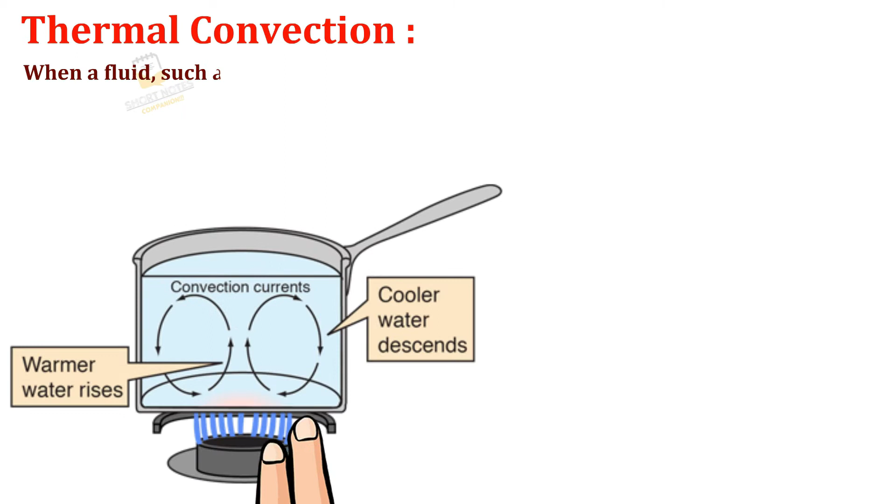What is thermal convection? When a fluid such as air or a liquid is heated and then travels away from the source, it carries the thermal energy along. This type of heat transfer is called convection. At the molecular level, the molecule expands upon the introduction of the thermal energy, becomes less dense and rises, as you can see in this picture.

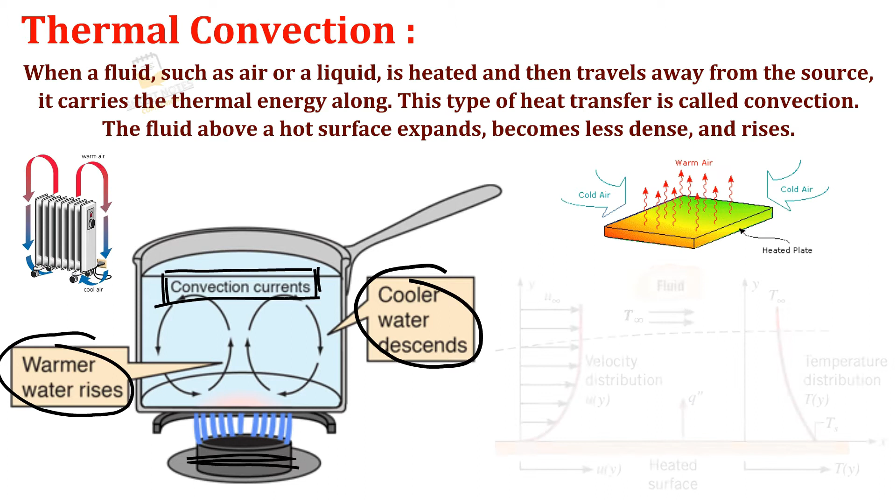This rising and descending of the fluid causes convection current. Space heater is a very good example of it. This diagram represents how is the velocity distribution and temperature distribution of fluid during convection. In one line, we can define thermal convection as heat energy transferred between a surface and a moving fluid with different temperatures is known as convection.

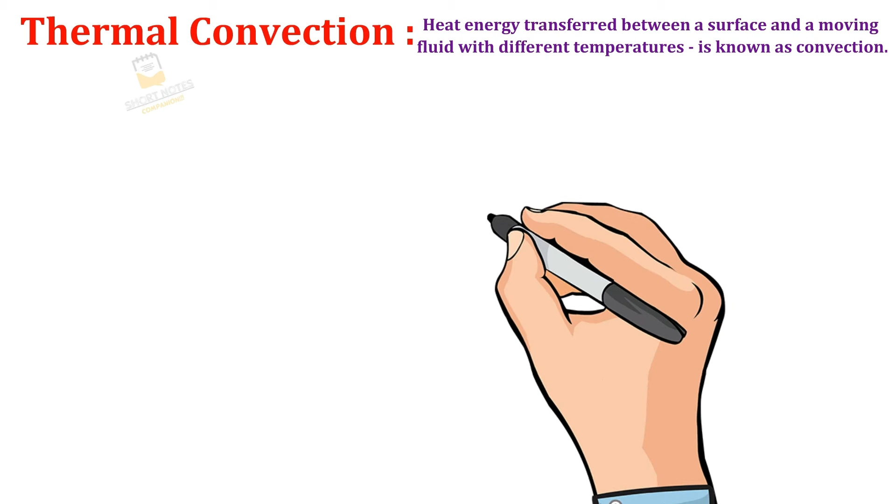Convection is broadly classified into two types. First is forced or assisted convection, in which fluid is forced to flow over the hot body. It requires external force such as a pump or a fan. As you can see in this picture, you can observe the temperature distribution varies from surface temperature to free stream temperature, and heat flux varies from leading edge to trailing edge. Heat decreases along the length of the hot body.

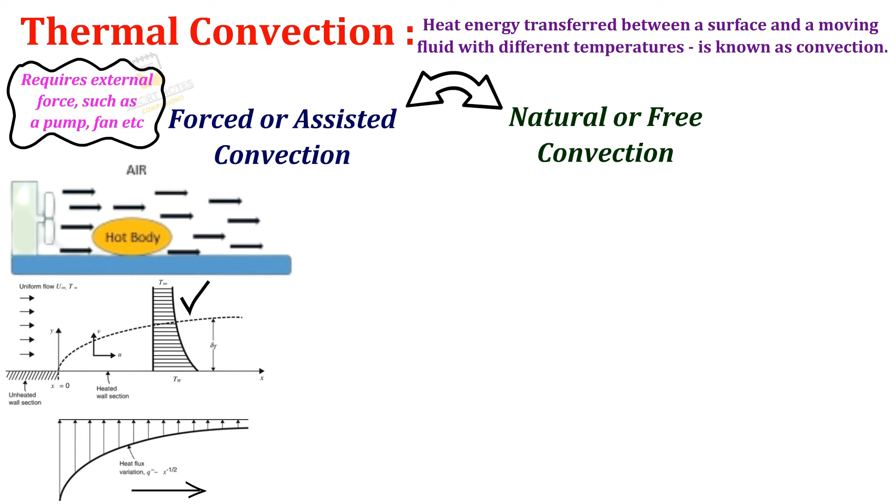Second type is natural or free convection. This type of convection will occur when the fluid is coming in contact with the hot body without having any external force. This happens due to buoyancy force occurring due to density differences. Here you can see the temperature distribution, and fluid will always flow in upward direction. For an example, we can observe this heated vertical wall where fluid flow again is upward due to convection heat transfer. Same for horizontal plate, where downside is heated, the fluid is crossing the plate sidewise and going upwards.

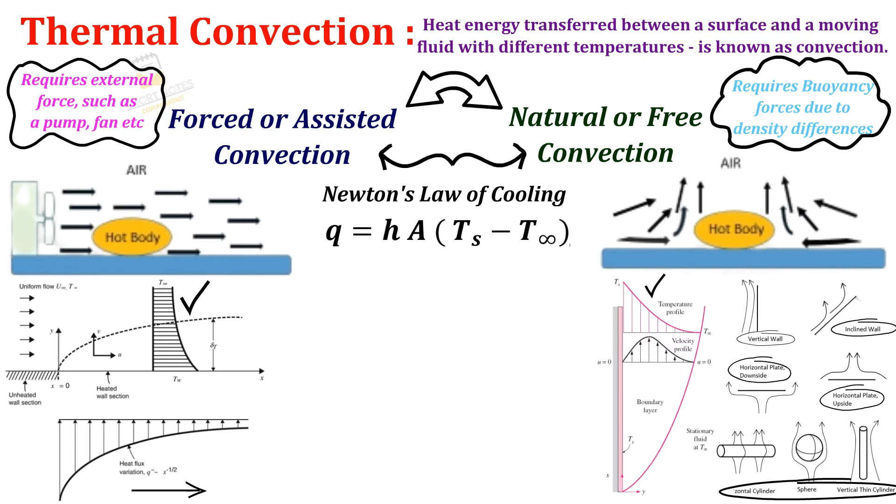This will happen when the heated body is introduced in stationary fluid. Now for both the convections, governing law is Newton's law of cooling, which is Q equals HA(Ts - T infinity). Usually the value of H is found out by conducting various experiments. Typical standard values for convective heat transfer coefficient: for free convection, gases have 2 to 20, liquids have 50 to 1000; for forced convection, gases have 25 to 300, and for liquids 100 to 40,000. And for convection with phase change, boiling or condensation, it is very high, about 2500 to 1 lakh.

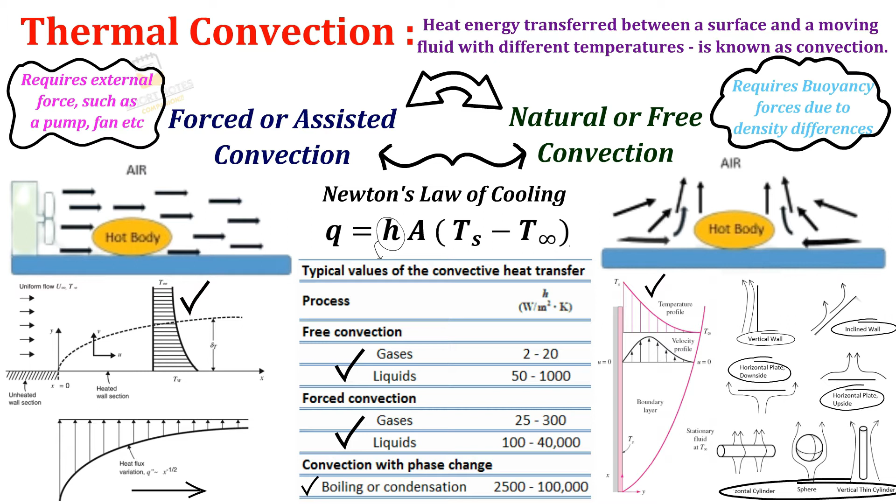Next हम देखते हैं important dimensionless numbers जो हम थर्मल कन्वेक्शन में यूज करते हैं उसको एनालाइज करने के लिए। तो सबसे पहला है रेनॉल्ड्स नंबर। इट इज द रेशियो ऑफ inertia force upon viscous force, and it can be written as rho v L upon mu, or v into L upon nu, where nu is kinematic viscosity, mu upon rho, and Reynolds number signifies whether the flow is laminar or turbulent.

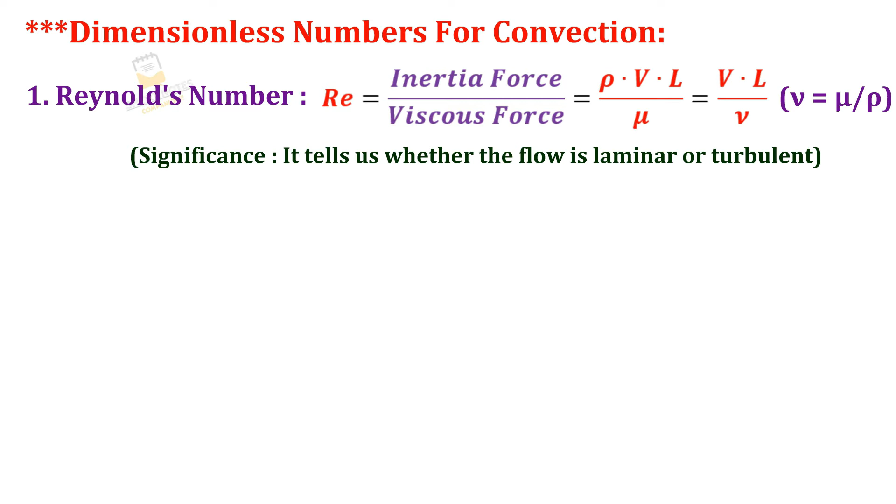Then next is Nusselt number. Nusselt number is ratio of convective heat transfer upon conductive heat transfer, which can be written as HL upon K, and it signifies the enhancement of heat transfer due to convection as compared to conduction.

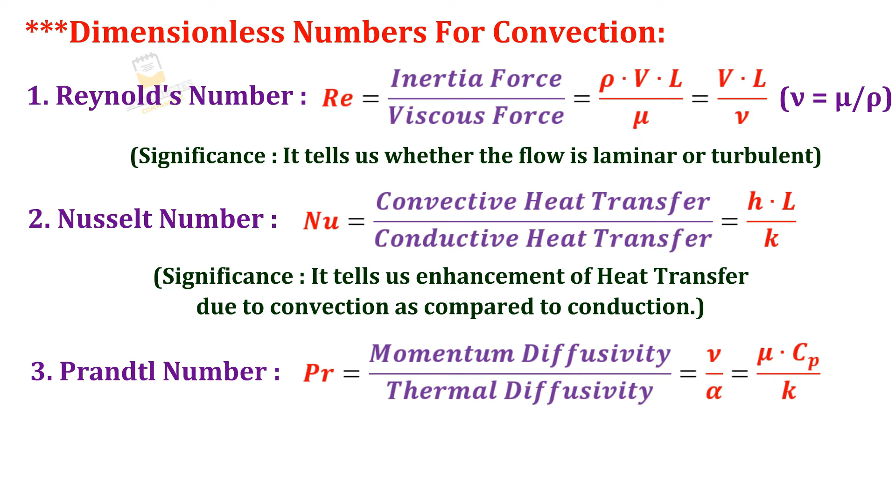अगला है प्रांटल नंबर, जो होता है रेशियो ऑफ मोमेंटम डिफ्यूजिविटी अपॉन थर्मल डिफ्यूजिविटी, म्यू सीपी अपॉन के, और ये हमें बताता है कि थिकनेस ऑफ थर्मल बाउंड्री लेयर कितनी है एज कंपेयर टू वेलोसिटी बाउंड्री लेयर। इट आल्सो टेल्स अस अबाउट टाइप ऑफ फ्लूइड बिकॉज इट इज अ प्रॉपर्टी ऑफ फ्लूइड।

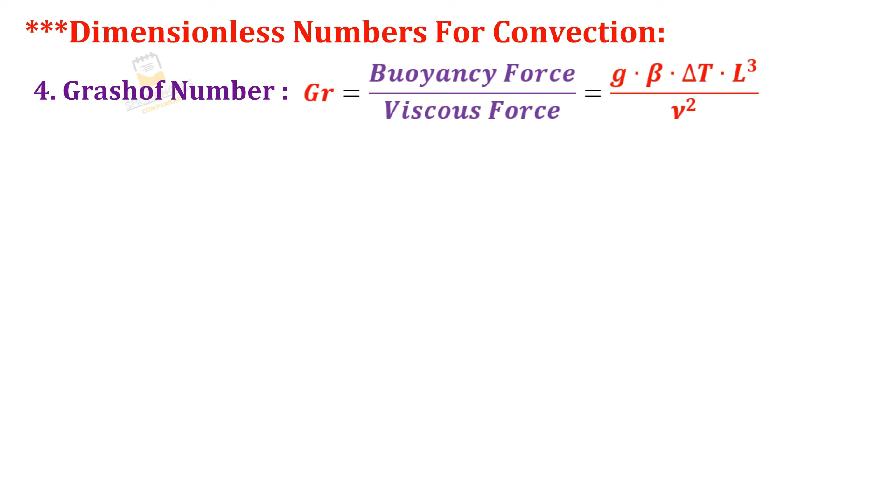नेक्स्ट नंबर है ग्राशॉफ्स नंबर, जो है रेशियो ऑफ buoyancy force upon viscous force, and it can be written as G beta delta T L cube upon nu square, where nu is again kinematic viscosity, and its significance is it is associated with buoyancy driven flow, and it is used in flow analysis of natural convection. Next, Rayleigh number.

Rayleigh number is the product of Grashof number into Prandtl number, and it tells us whether the flow is laminar or turbulent in case of natural convection.

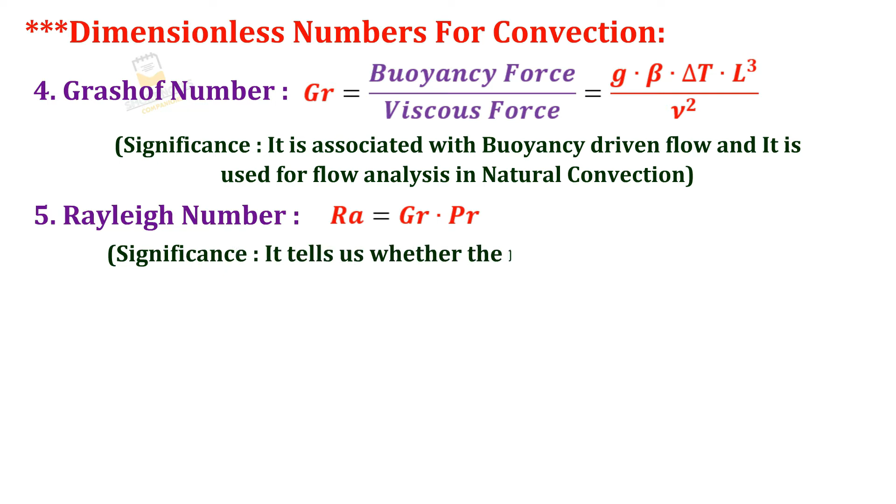Sixth is Stanton number. It is the ratio of convective heat transfer upon heat capacity of the fluid, which we can write as Nusselt number upon product of Reynolds number into Prandtl number, or H upon rho v Cp, and its significance is that we use it in force convection heat transfer calculations.

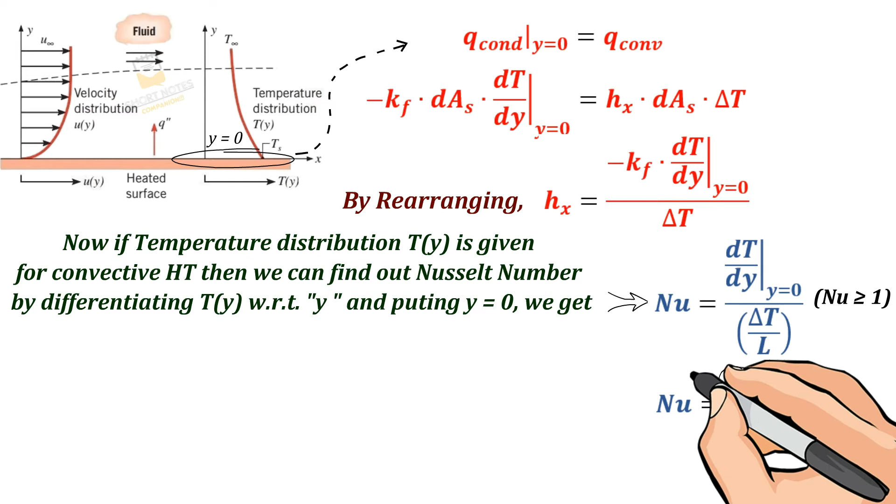L is characteristic length, and for flat plate it is x, for pipe with diameter d it is d, and for rectangular cross section it is 4a/p, where a is cross section area and p is wetted perimeter.

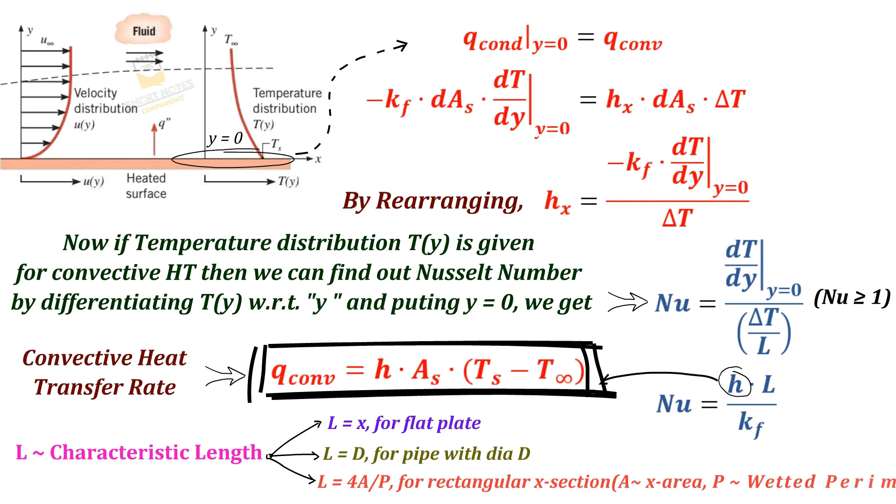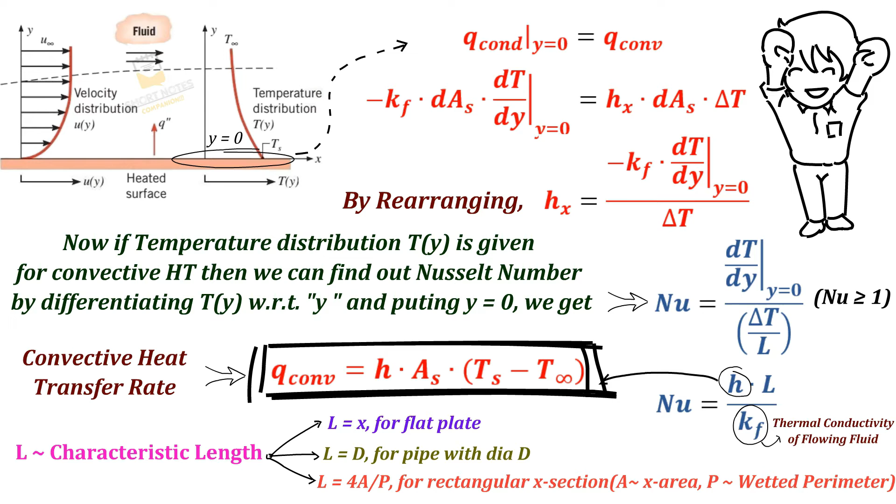Here kf is thermal conductivity of flowing fluid. Remember, in next part of the video we will consider only k, and it will represent the thermal conductivity of flowing fluid only. Next we start with forced convection, in which the first case is forced convection over a flat plate.

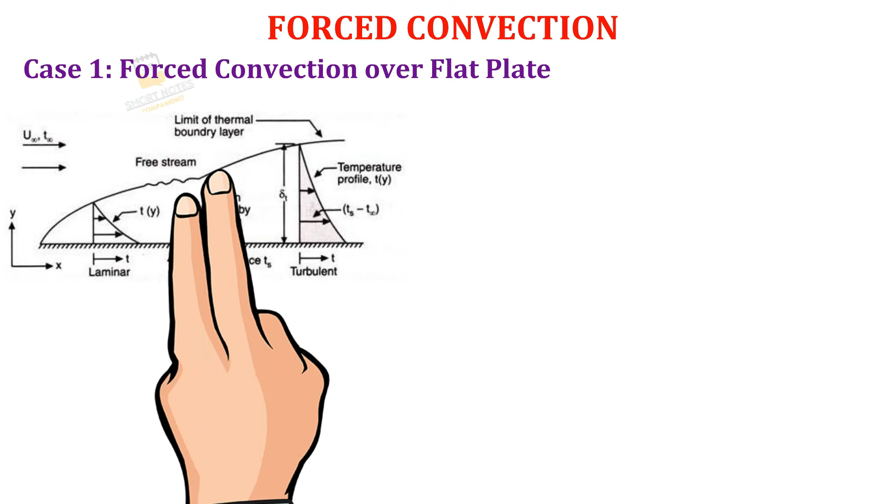You can observe this in the diagram. If the Reynolds number value is less than 5 × 10⁵, we say the flow is laminar, and for fully developed laminar flow where x critical > L, you can write Nusselt number = hx/k = 0.332 √Rex into Prandtl number power 1/3.

Average heat transfer coefficient can be found by using 1/L integration from 0 to L of hx dx, where we get average heat transfer coefficient = 2 times HL or hx, and average Nusselt number can be written as 0.664 √ReL Prandtl number power 1/3. This is the average over full length.

Then Prandtl number power 1/3 is equal to velocity boundary layer thickness upon thermal boundary layer thickness, and for Prandtl number equal to 1, that is for gases, both the boundary layers become the same.

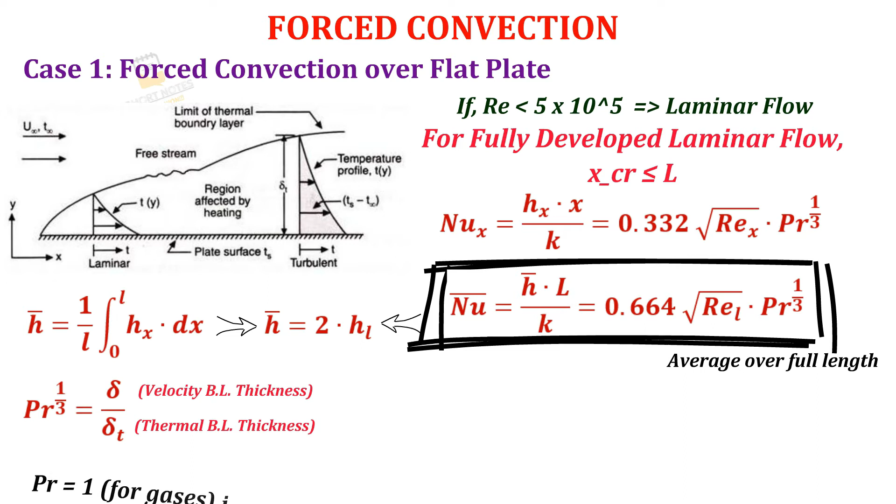Now according to Reynolds analogy, Stanton number is equal to Cfx/2 when Prandtl number is equal to 1, and Stanton number into Prandtl number power 2/3 is equal to Cfx/2 by Colburn's analogy when Prandtl number is not equal to 1, and this Cfx is skin friction coefficient.

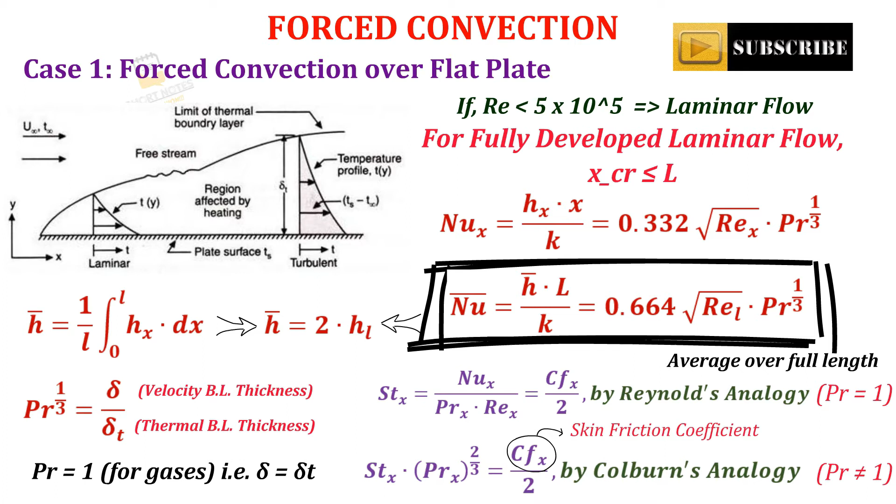Next we look at turbulent flow. If Reynolds number is greater than 6.5 to 7 into 10⁵, then we can say there is turbulent flow, and for fully turbulent flow, that is x critical is very less than L, Nusselt number is equal to 0.029 Re power 0.8 into Pr power 1/3.

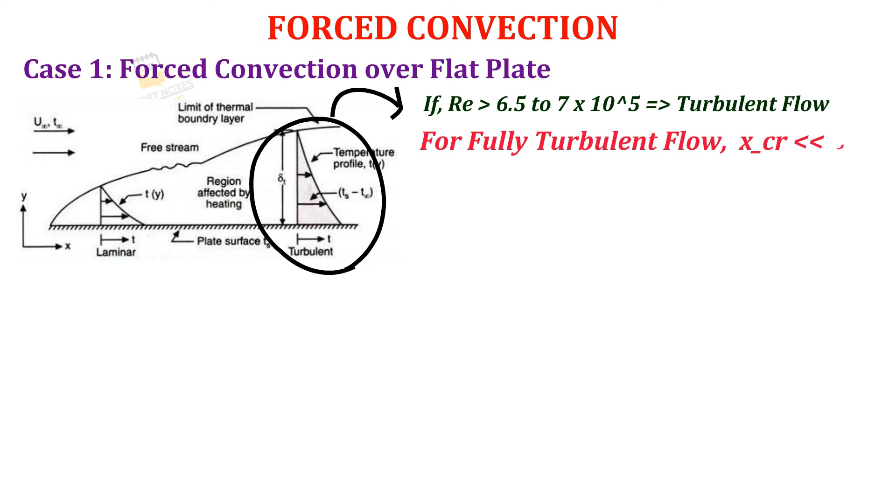For transition flow, meaning when Reynolds number is between laminar and turbulent, Nusselt number value is 0.036 Re power 0.8 minus 870 into Pr power 1/3, and in turbulent case average heat transfer coefficient is equal to 5/4 into hx.

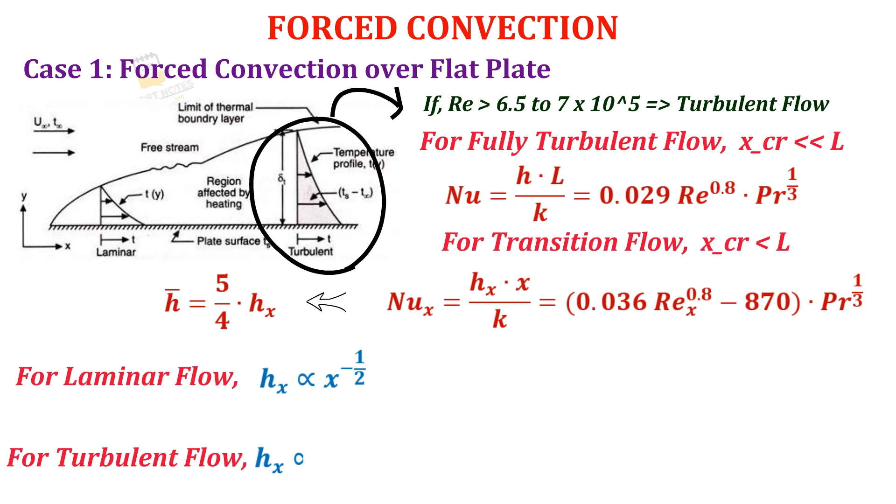For laminar flow, hx is directly proportional to x power -1/2, and for turbulent, hx is directly proportional to x power -1/5.

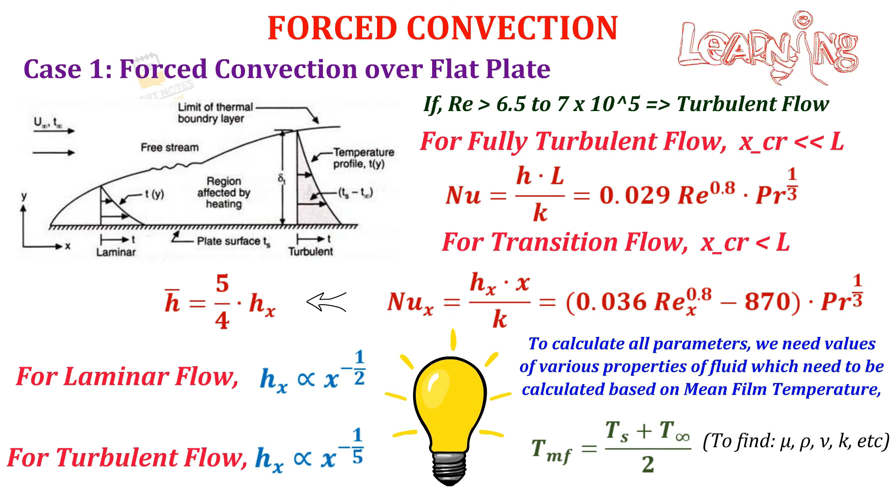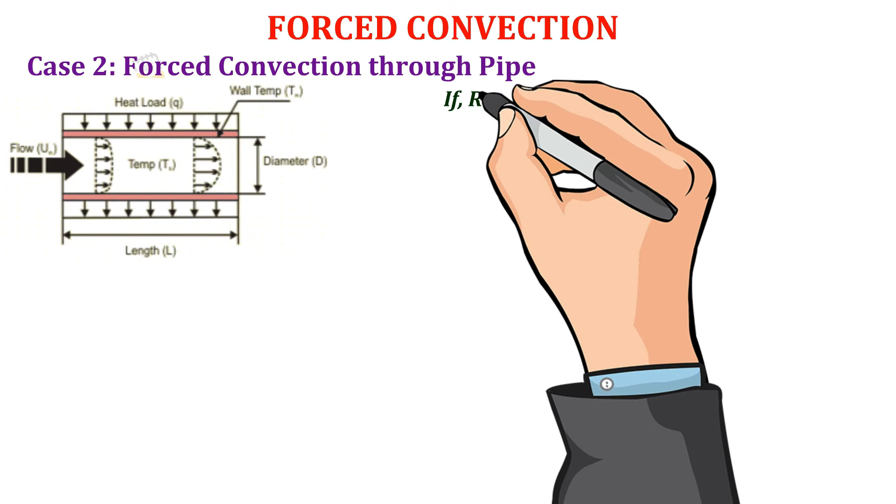Now we look at case 2, forced convection through pipe. In this case, if Reynolds number is less than 2300, then there will be laminar flow, and in this first case is constant wall temperature, meaning surface temperature remains constant and fluid temperature is changing from inlet to exit.

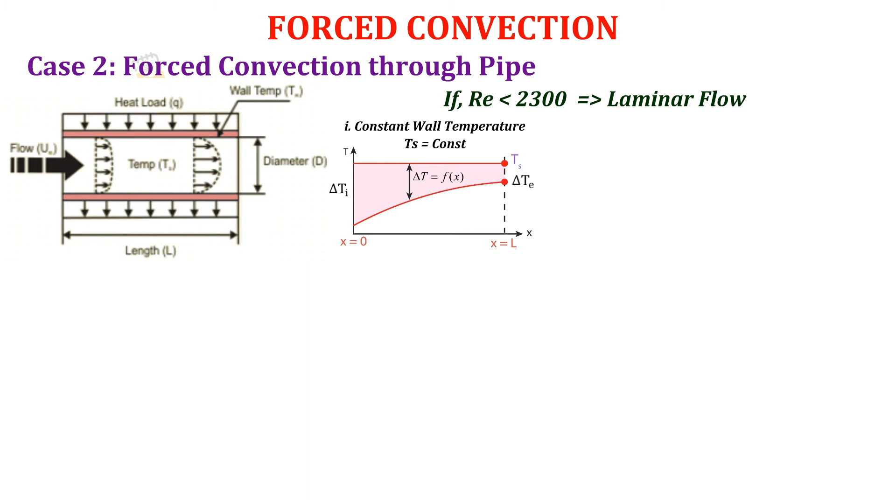In this case, Nusselt number has a constant value of 3.66, and this temperature change of fluid is exponentially distributed.

This can be calculated using the formula: delta T upon delta Ti equals e power minus HAS upon mCp.

Now if we need to calculate the heat transfer rate, we can calculate it as HAS delta Tm, where delta Tm is LMTD, same as we have seen in heat exchangers.

Now the second case is constant wall heat flux, where heat flux is constant over the entire tube surface. For this case, the Nusselt number value remains constant at 4.36, and in this case LMTD: delta Ti equals delta To, as delta T remains constant.

If Reynolds number is greater than 4000, then it will be turbulent flow, and for this Nusselt number equals 0.023 Re power 0.8 Pr power n, where n is 0.4 for heating of fluid and n is 0.3 for cooling of fluid.

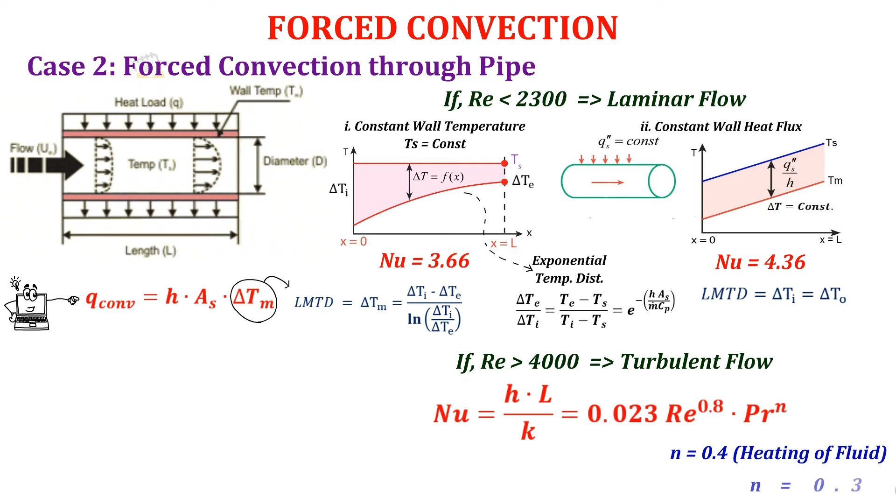Now bulk mean temperature of fluid is the mean of inlet and exit temperature of fluid, and mean film temperature is surface temperature plus bulk temperature upon 2. Here we can also write Q convective equals HAS times (Ts minus T bulk).

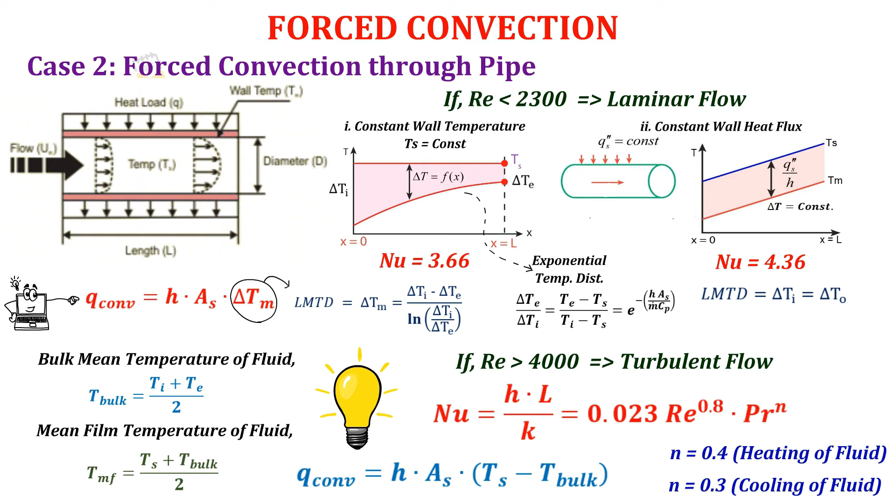In natural convection, the first case is a horizontal plate, for which the Nusselt number value is 0.54 Ra power 0.25, where Ra is the product of Grashof's number and Prandtl number, and Grashof's number is G beta delta T L cube upon nu square.

Here G is acceleration due to gravity, beta is 1 upon mean film temperature in Kelvin, delta T is Ts minus T infinity, and L is the characteristic length.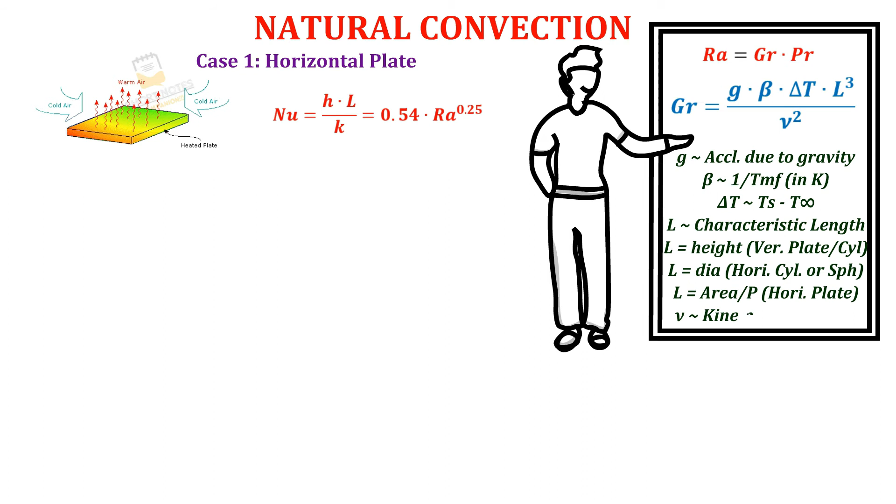In natural convection, L equals height for vertical plate or cylinder, L equals diameter for horizontal cylinder or sphere, and L equals area upon perimeter for horizontal plate. Now for the vertical plate case, flow will be laminar if Rayleigh's number is between 10 power 4 and 10 power 9.

Nusselt number is equal to 0.59 times Rayleigh's number power 0.25. And for the turbulent case, Rayleigh's number should be greater than 10 power 9 and less than 10 power 12, and for this Nusselt number equals 0.13 Ra power 0.3.

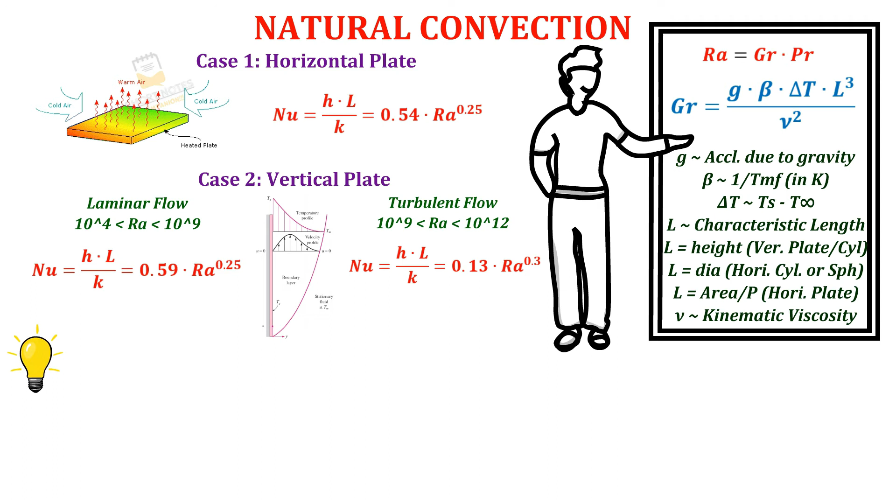Now there is one more important dimensionless number, the Richardson number, equal to Gr upon Re power 2, which tells us the type of convective heat transfer. If this number is much greater than 1, natural convection dominates. If it is much less than 1, forced convection dominates, and if it equals 1, mixed convection occurs.

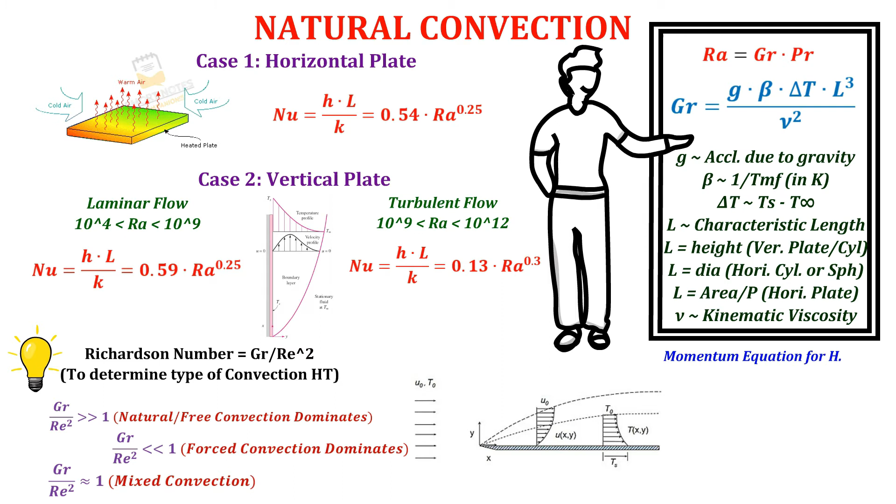For the hydrodynamic boundary layer, the momentum equation is U (dU/dX) plus V (dU/dY) equals nu (d2U/dY2), and the energy equation for the thermal boundary layer is U (dT/dX) plus V (dT/dY) equals alpha (d2T/dY2).

And in natural convection, Nusselt number is directly proportional to delta T power m, where m equals 0.25 in the laminar case and 0.3 in the turbulent case.

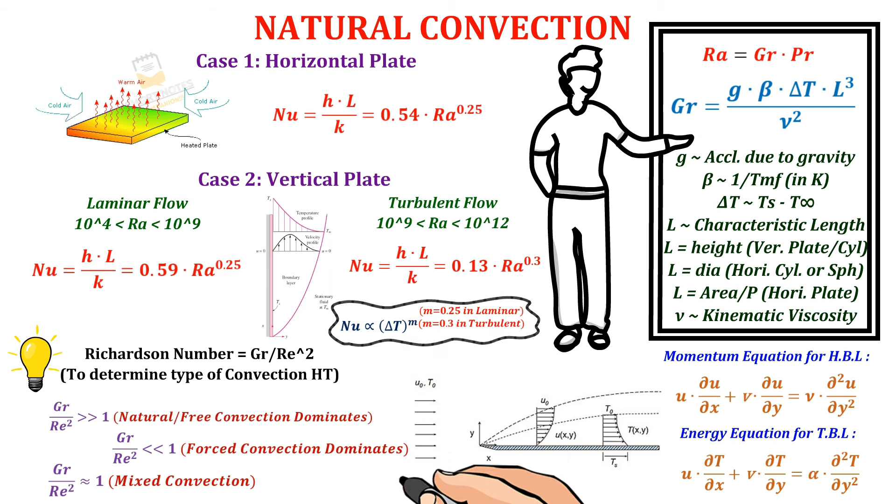Now we have finished the convection part. Next we will start radiation. So what is thermal radiation? Thermal radiation is very different from conduction and convection, as it does not require any material medium.

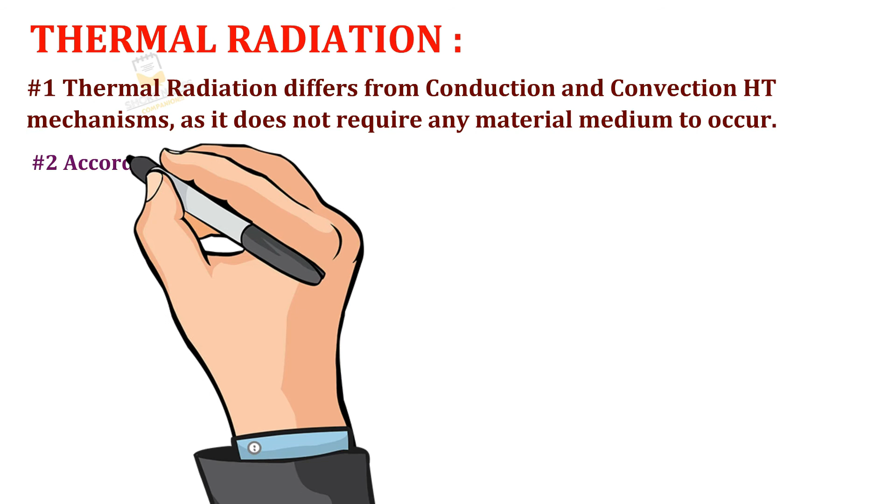Radiation heat transfer के लिए किसी भी मीडियम की जरूरत नहीं होती. मैक्सवेल सर ने बोला है कि एनर्जी ट्रांसफर जो होती है रेडिएशन में, वो इलेक्ट्रोमैग्नेटिक वेव के फॉर्म में होती है, and energy transfer by radiation occurs at speed of light, and best effect we can see it in vacuum.

Electromagnetic spectrum is spread over a wide range of wavelengths. Thermal radiation occurs in the range of 100 microns to 0.1 microns, which includes infrared, visible and some part of ultraviolet spectrum. So remember, thermal radiation occurs from 0.1 micron to 100 microns.

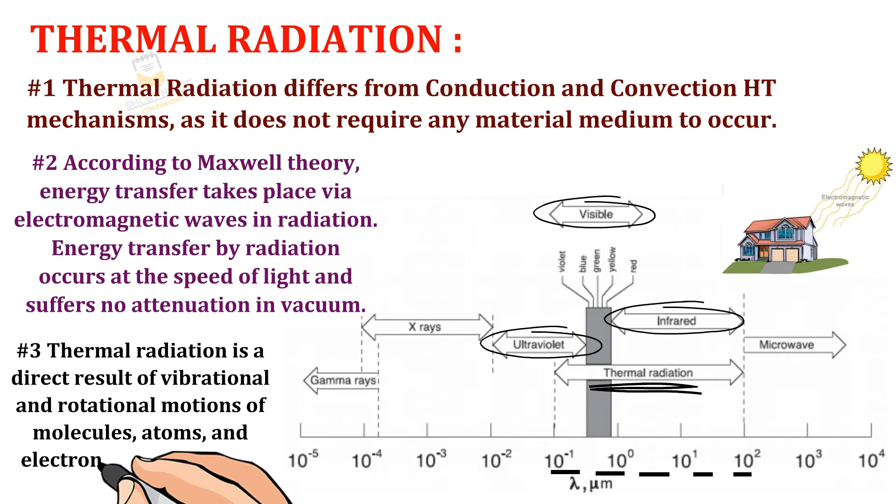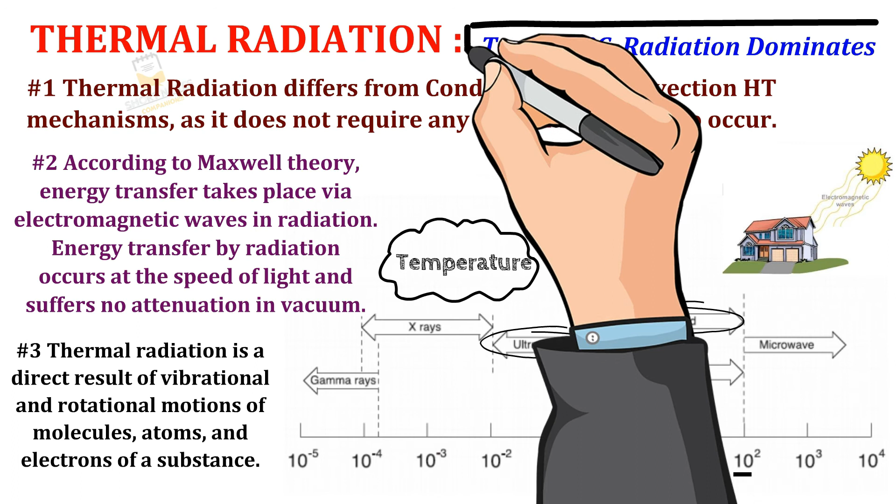This thermal radiation is a direct result of vibrational and rotational motions of molecules, atoms and electrons. It completely depends on temperature, and if temperature is above 1000 degrees Celsius, then radiation will dominate over other modes of heat transfer. Now we will see black body radiation.

Now what is black body? ब्लैक बॉडी ऐसी बॉडी है जो परफेक्ट एमिटर है और एब्जॉर्बर है रेडिएशन का. सो ब्लैक बॉडी हैज हाईएस्ट कैपेसिटी फॉर रेडिएशन.

Black body is a diffuse emitter as it emits radiation uniformly in all directions. It also absorbs all incident radiation regardless of wavelength and direction.

For quantifying this, Stefan Boltzmann has stated the law that emissive power of black body is directly proportional to the fourth power of temperature of black body. So Eb is equals to sigma T power 4 in watt per meter square, where Eb is black body emissive power and sigma is Stefan Boltzmann constant 5.67 into 10 power minus 8.

Sir Planck has stated a law for spectral emissive power of black body, which defined as C1 upon lambda power 5, e power C2 upon lambda t minus 1, where lambda is wavelength and t is temperature, where C1 has value of 3.742 into 10 power 8 and C2 having value of 1.439 into 10 power 4.

This expression is valid when medium is vacuum or gas. Now for general medium, C1 can be replaced by C1 upon n square, where n is refractive index for the heat transfer medium. So remember this is for vacuum and gases.

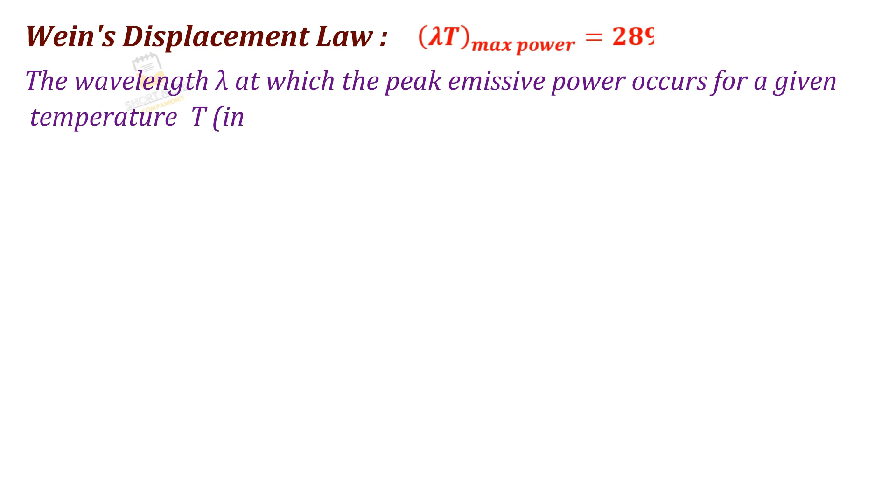Next we will see Wein's displacement law, which states that there is one particular wavelength for maximum emissive power for a given temperature, which we can define as lambda t is equals to 2898 micrometer Kelvin. So here you can see that for every particular temperature there is one wavelength where we get maximum emissive power.

Total black body emissive power can be calculated based on area under the graph of EB lambda versus lambda. So it can be written as emissive power is equal to integration of 0 to infinity EB lambda into d lambda. Now for emissive power between two wavelengths, we can have the range of integration from one wavelength to another wavelength.

अभी हम देखते हैं एक important term radiation की, that is emissivity, which is defined as the ratio of radiation emitted by any surface to the radiation emitted by the black body at the same temperature, which can be written as epsilon is equals to E upon EB, where EB is sigma T power 4.

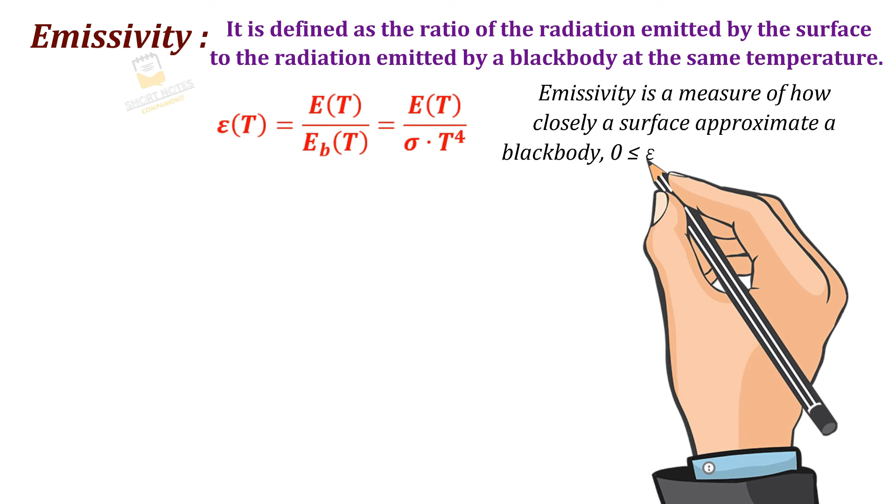Now emissivity is a measure of how closely a surface is approximated as a black body. Emissivity ranges from 0 to 1, and for black body its value is 1. Here spectral emissivity is defined as spectral emissive power of surface to the spectral emissive power of black body.

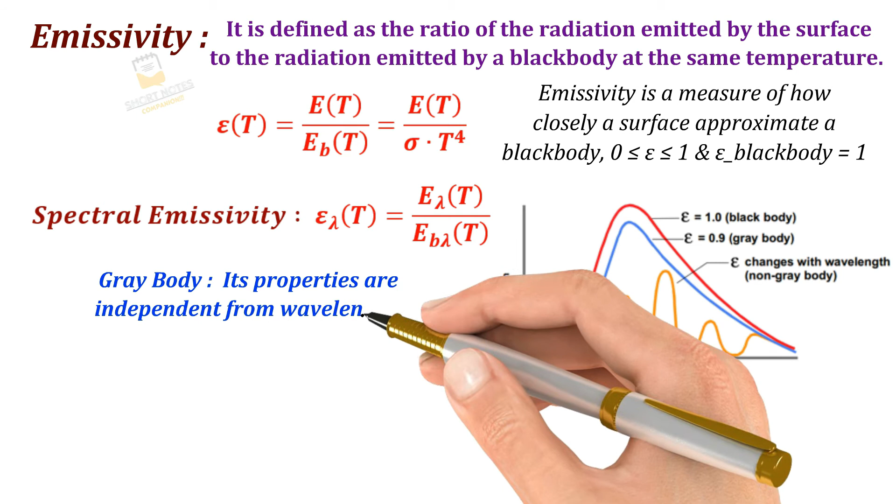ग्रे बॉडी ऐसी बॉडी है जिसकी प्रॉपर्टीज इंडिपेंडेंट होती है वेवलेंथ से और उसकी एमिसिविटी हमेशा कांस्टेंट रहती है with respect to any wavelength. Now this emissivity is a strong function of temperature. Diffuse body is a body whose properties are independent of direction.

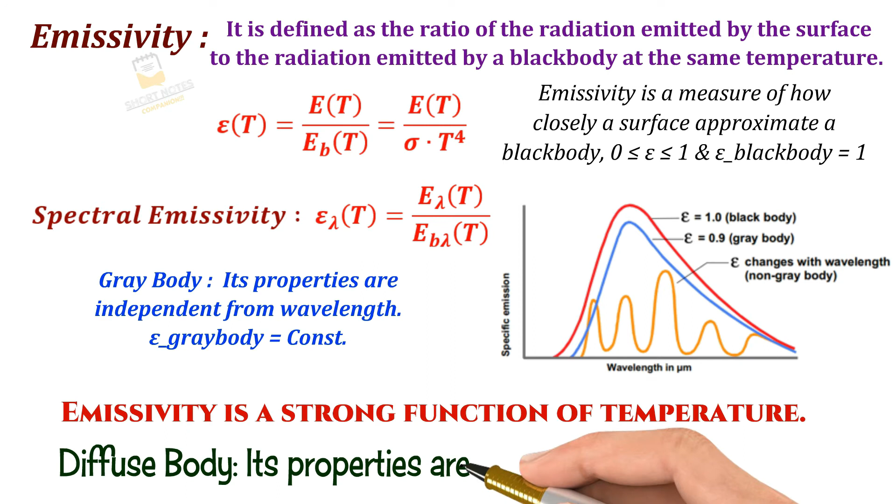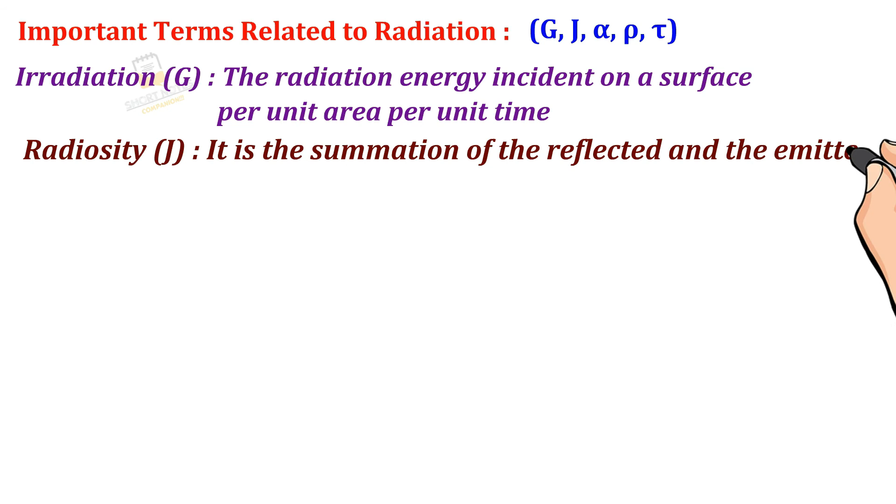Now we will see some of the important terms related to radiation, that is G, J, alpha, rho and tau. Irradiation G is the radiation energy incident on a surface per unit area per unit time. Radiosity J is the summation of the reflected and emitted radiation from the surface per unit area per unit time. With the help of this diagram, you can observe all the terms.

Now alpha is absorptivity, which is the ratio of absorbed radiation upon incident radiation. Rho is reflectivity, reflected radiation upon incident radiation. And transmissivity is transmitted radiation upon incident radiation. All these values range from 0 to 1. And the summation of absorbed, reflected and transmitted radiation is equal to irradiation.

We can say alpha plus rho plus tau is equal to 1. For opaque surfaces, transmissivity is 0, thus alpha plus rho is equal to 1. For black body, absorptivity is equal to 1.

Next is Kirchhoff's law, which states that at thermal equilibrium, absorptivity is equal to emissivity.

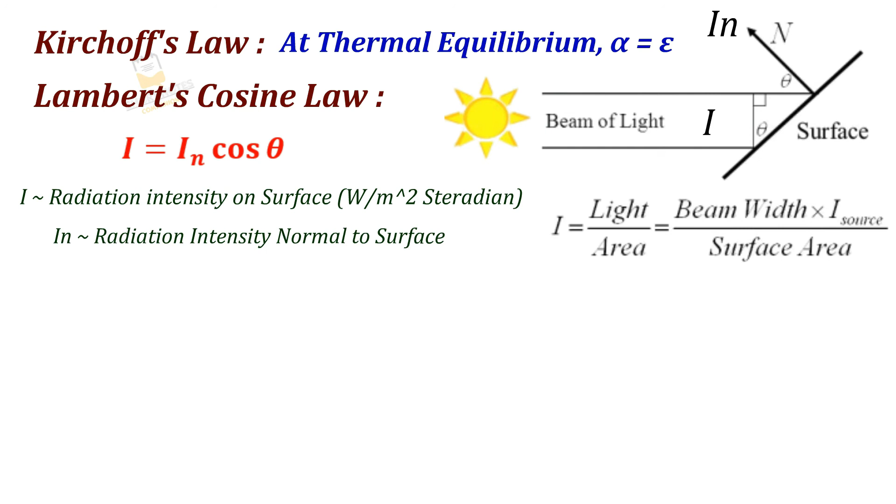Now Lambert's cosine law gives the relation for incident radiation intensity, defined as I is equal to In cos theta, where I is radiation intensity on surface in watts per meter square steradian, In is radiation intensity normal to surface, and theta is the angle of I with the normal plane.

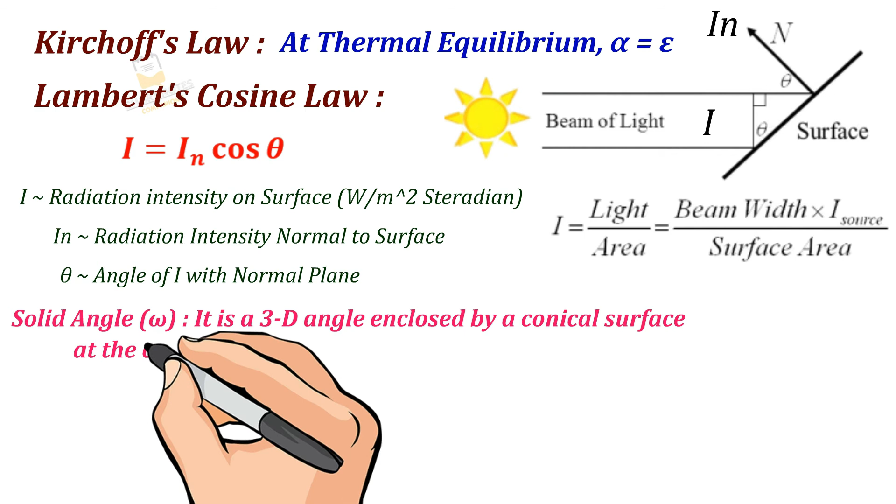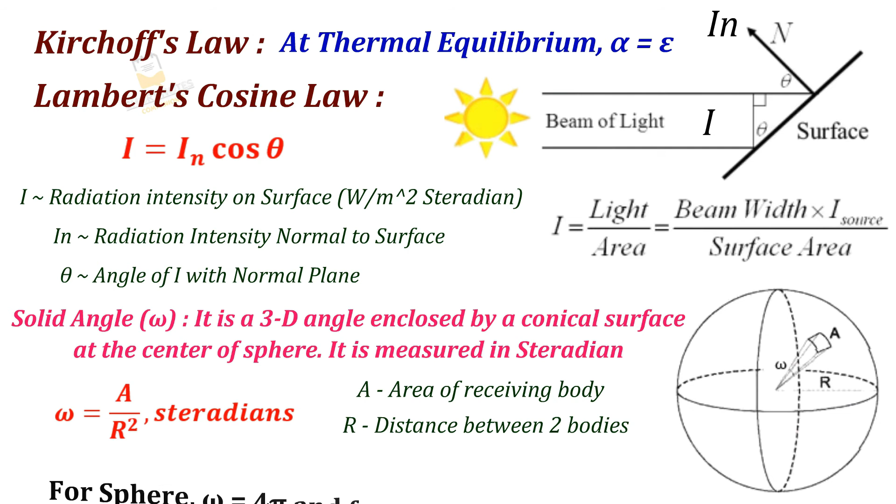Now what is solid angle, omega? It is a 3D angle enclosed by a conical surface at the center of a sphere, measured in steradians, written as omega is equal to A upon R square steradian, where A is area of receiving body and R is the distance between two bodies. For a sphere, omega is 4 pi, and for a hemisphere, omega is 2 pi steradians.

Now we will see total emission among two bodies, defined as E1 to 2 is equal to I A1 cos theta 2 into omega, where I is defined as In cos theta 1. Always remember theta 1 is always equal to theta 2, and A1 is area of the emitting surface. For a diffuse body, I is equal to In, and for a black body, emissive power is equal to pi into In.

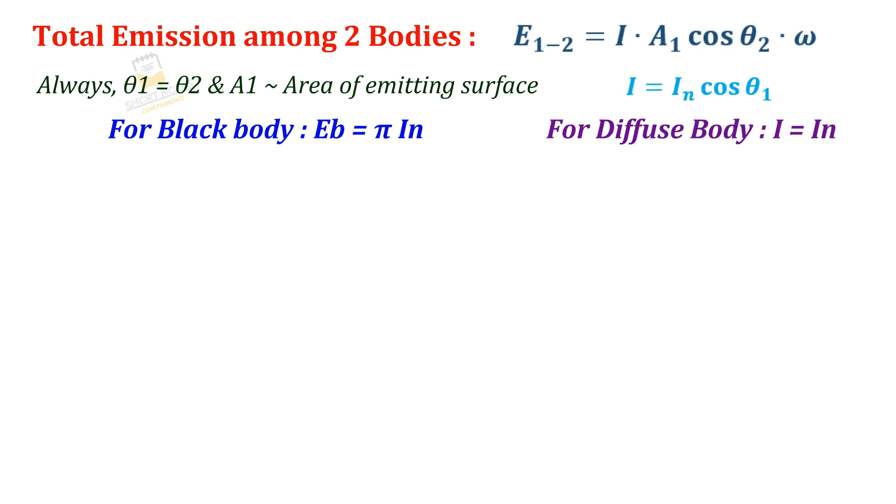Now the view factor or shape factor is a very important term, written as Fij. It is a purely geometric parameter that accounts for the effect of orientation on radiation between surfaces. F12 means the amount of radiation from surface 1 that is received by surface 2.

For n surfaces, the total number of Fij, the view factors, is n square. Now Fii is the view factor between a surface and itself. For plane surfaces, Fii is equal to 0. For convex surfaces also, Fii is equal to 0, and for concave surfaces, it is not equal to 0.

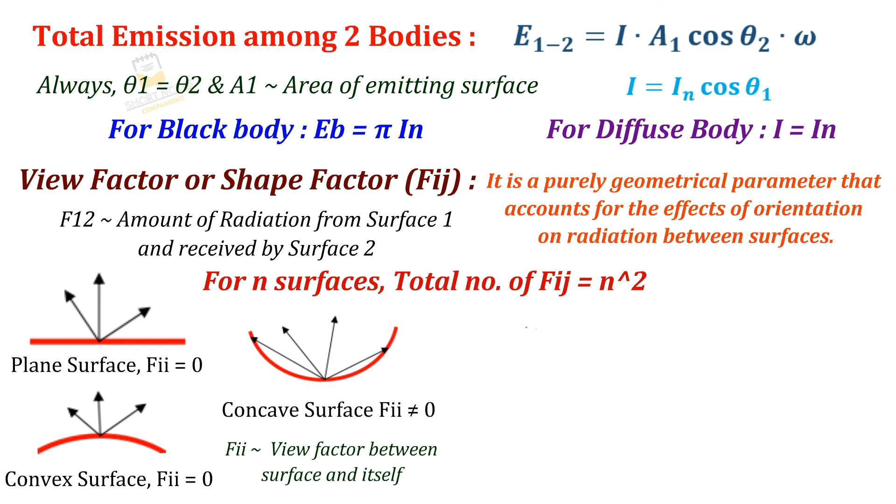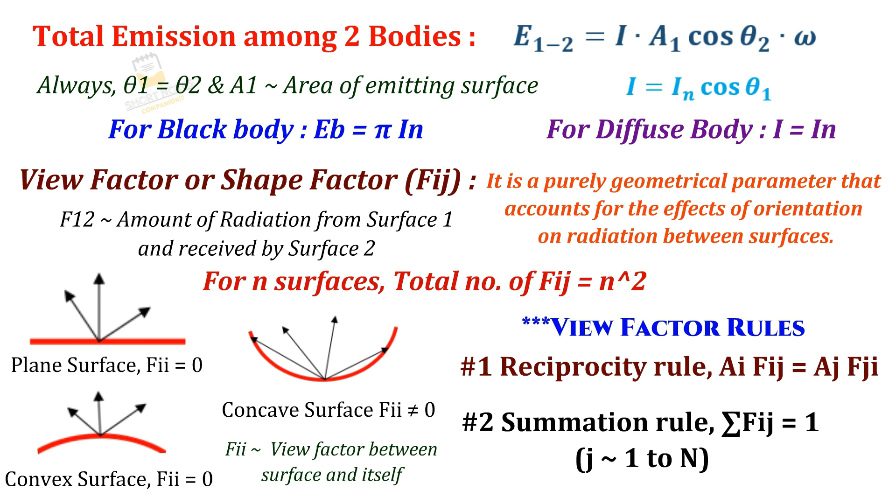Now view factors have some rules. The first rule is the reciprocity rule, written as Ai Fij is equal to Aj Fji. The second rule is the summation rule, in which the summation of Fij is equal to 1, where j varies from 1 to n.

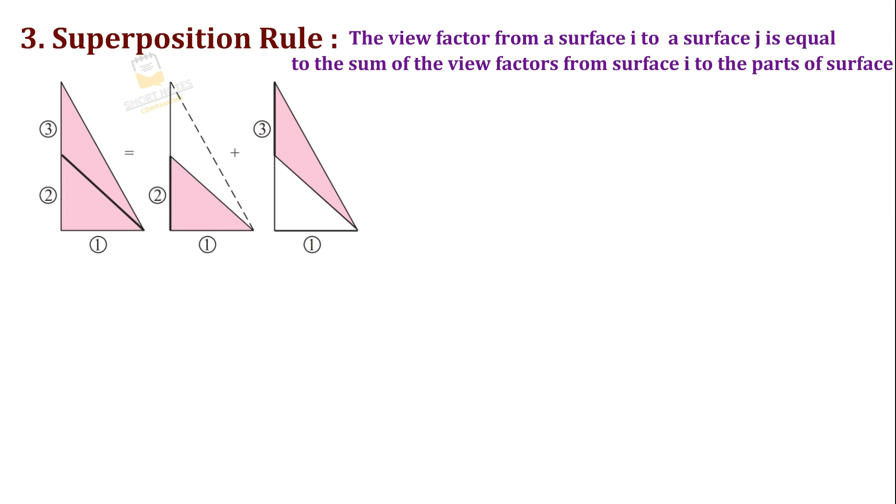The third rule is the superposition rule, defined as the view factor from surface I to surface j is equal to the sum of view factors from surface I to the parts of surface j. So we can write F1 to 2,3 is equal to F12 plus F13. Its reverse is not true. For F2,3 to 1, we have F23to1 equals a2 F21 plus a3 F31, upon a2 plus a3. The fourth rule is the symmetry rule.

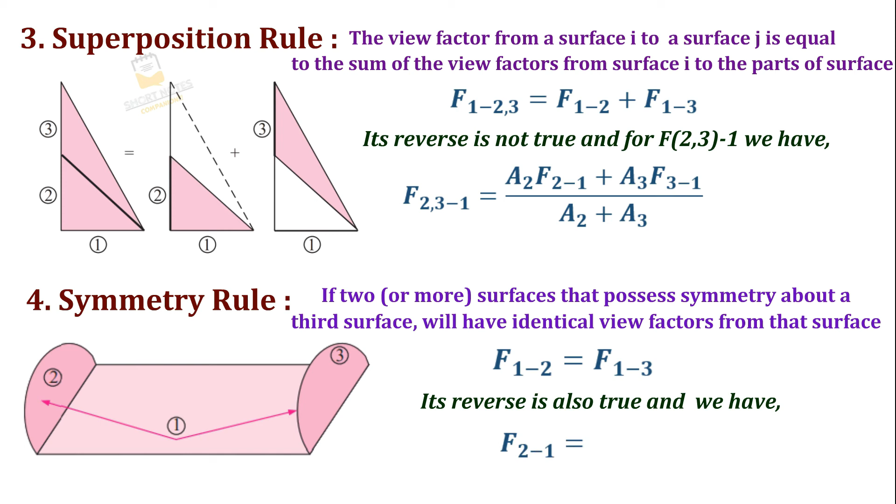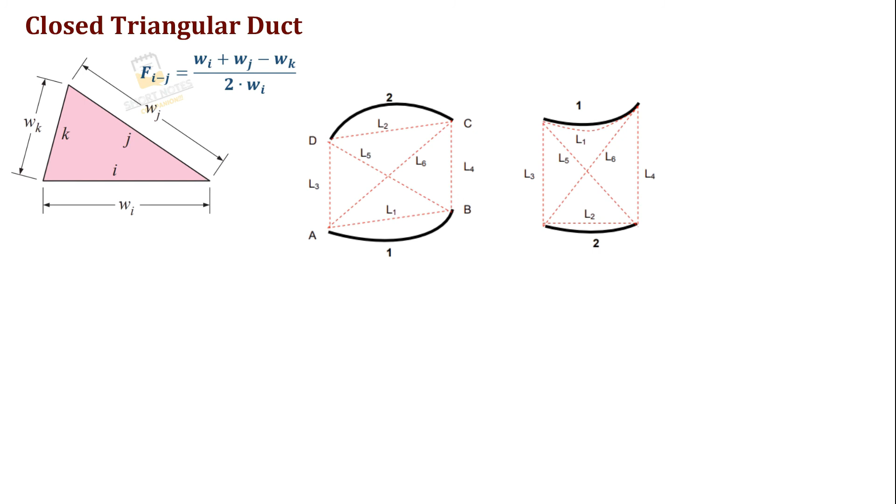For a closed triangular duct with sides wi, wj, wk, Fij is defined as wi plus wj minus wk upon 2wi. We can use the cross strings method for irregular surfaces.

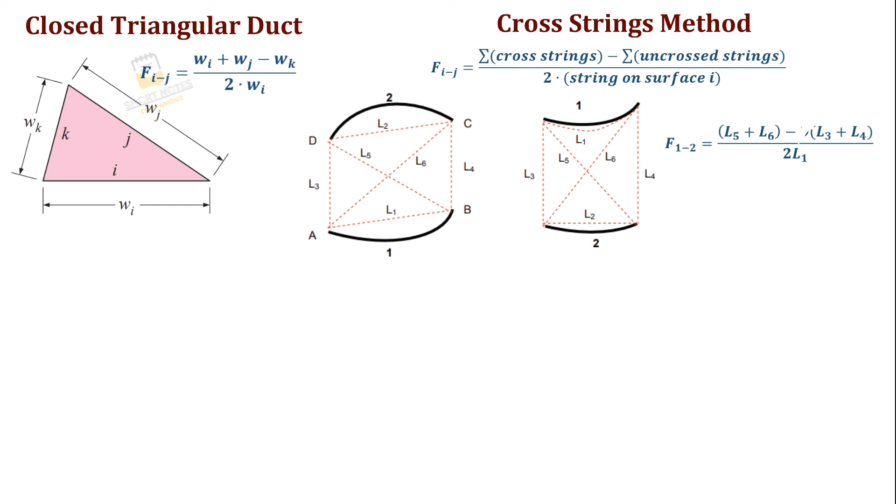We can define Fij as equal to the summation of cross strings minus the summation of uncrossed strings, upon 2 into the strings on surface I. For this example, F12 is equal to L5 plus L6 minus L3 plus L4, upon 2L1.

If two plates are inclined with a common edge, then we can have F12 is equal to 1 minus sine of half alpha, where alpha is the angle between these two plates.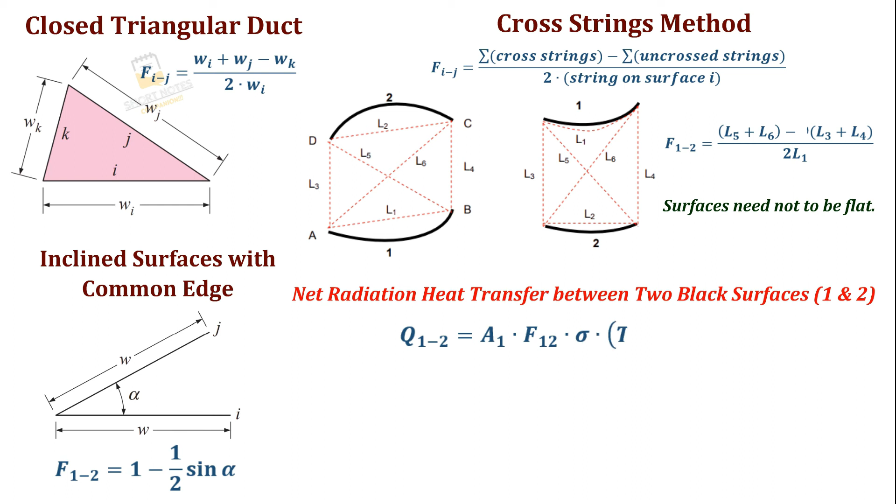Now net radiation heat transfer between two black surfaces 1 and 2 can be defined as Q1 to 2 is equal to A1 F12 sigma into T1 power 4 minus T2 power 4, and this 1 upon A1 F12 is called the shape or space resistance.

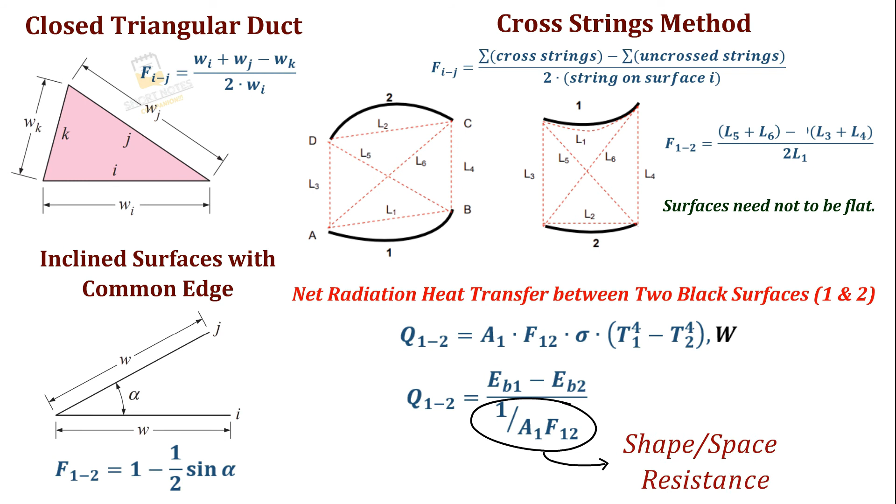Now we'll see how real surfaces behave with this radiation heat transfer. So radiosity from a surface is equal to emissivity into emissive power plus 1 minus emissivity into irradiation.

So net heat transfer from surface I, we can write as emissive power minus radiosity, upon 1 minus epsilon upon AI epsilon. This term is called surface resistance, and this surface resistance is absent for black body radiation.

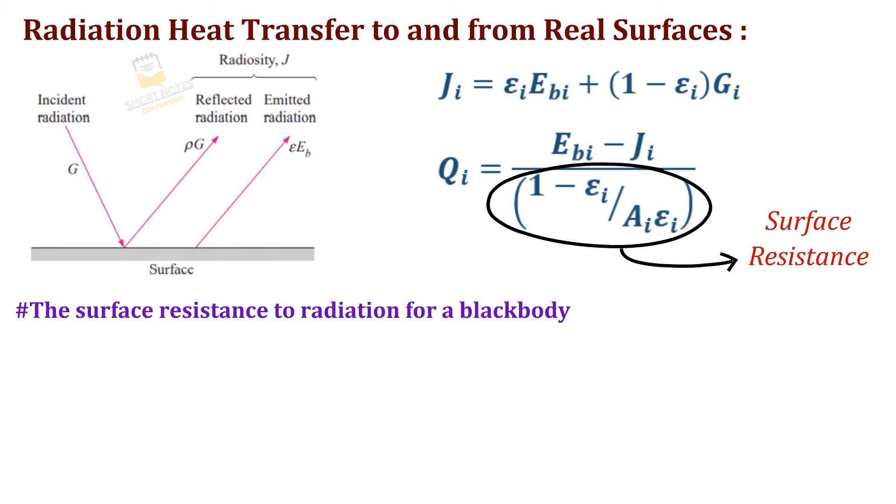For insulated or adiabatic surfaces, the net heat transfer is 0, and this surface is called a re-radiating surface, with no net heat transfer to the re-radiating surface.

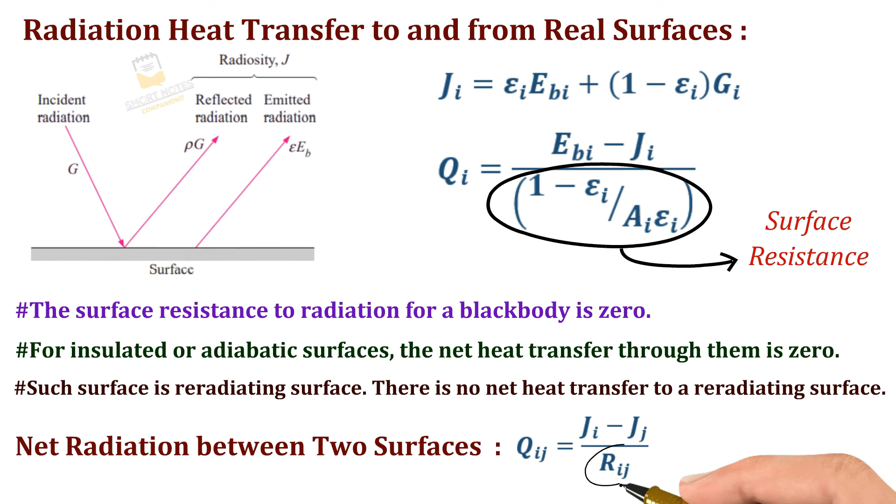To find out net radiation between two surfaces, we have Qij equal to the difference between radiosities upon Rij, where Rij is the shape or space resistance.

Now we'll see some important cases asked in exams. First case is small body enclosed in a large body. Net thermal radiation for this case is Q12 equal to epsilon bar times A1 times (Eb1 minus Eb2), where epsilon bar is called equivalent emissivity, and here epsilon equals epsilon 1.

Second case is infinitely long two parallel plates. For this, F12 equals 1 and Q12 equals A1 sigma (T1 power 4 minus T2 power 4) upon (1 upon epsilon 1 plus 1 upon epsilon 2 minus 1). Here the equivalent emissivity will be 1 upon epsilon 1 plus 1 upon epsilon 2 minus 1.

Third case is infinitely long concentric cylinders, small cylinder to larger cylinder. F12 equals 1 and Q12 equals A1 sigma (T1 power 4 minus T2 power 4) upon (1 upon epsilon 1 plus (1 minus epsilon 2) upon epsilon 2 into R1 upon R2). Fourth case is concentric spheres.

Here also F12 equals 1, Q12 equals A1 sigma (T1 power 4 minus T2 power 4) upon (1 upon epsilon 1 plus (1 minus epsilon 2) upon epsilon 2 into (R1 upon R2) whole square). In a similar way, we can calculate equivalent emissivity.

Next we will see thermal radiation with radiation shields. This is a very important topic. Now we will see two parallel plates with a radiation shield in between.

For this, Q12 with shield will be A1 sigma (T1 power 4 minus T2 power 4) upon (1 upon epsilon 1 plus 1 upon epsilon 2 plus 2 upon epsilon 3 minus 2).

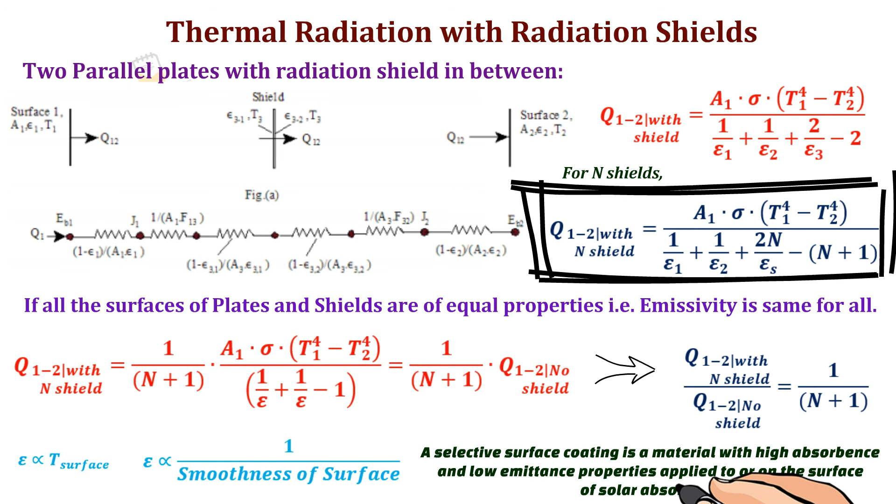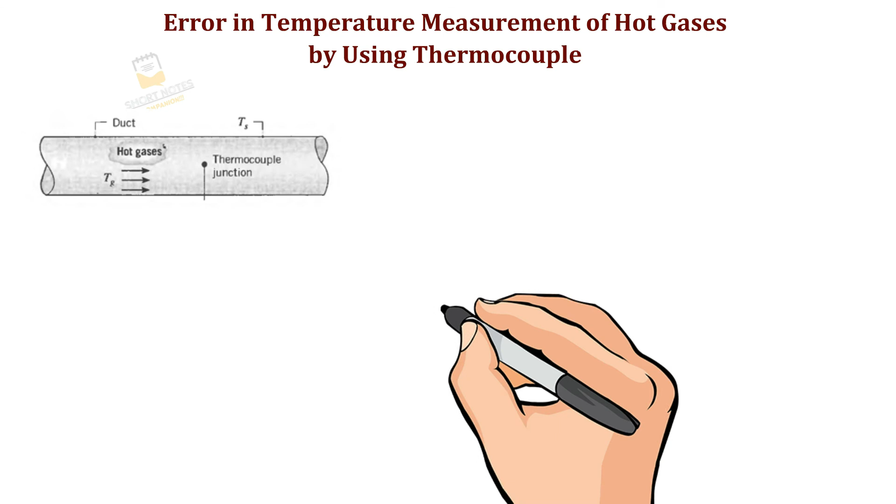Next we'll see the last topic: error in temperature measurement of hot gases using a thermocouple. When we need to measure the hot gases' temperature flowing through a duct, we use a thermocouple junction. Now, hot gases transfer heat to the thermocouple by convection.

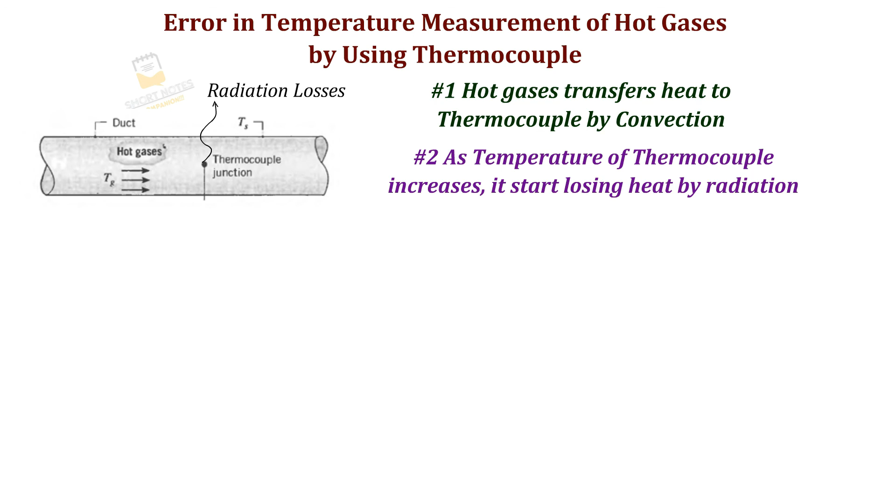So here, H(Tg minus Tc) equals epsilon sigma (Tc power 4 minus Ts power 4), where Tg minus Tc is called error in thermocouple, Tg is temperature of hot gases, Tc is temperature of hot gases measured by thermocouple, epsilon c is emissivity of thermocouple, and Ts is temperature of surface.

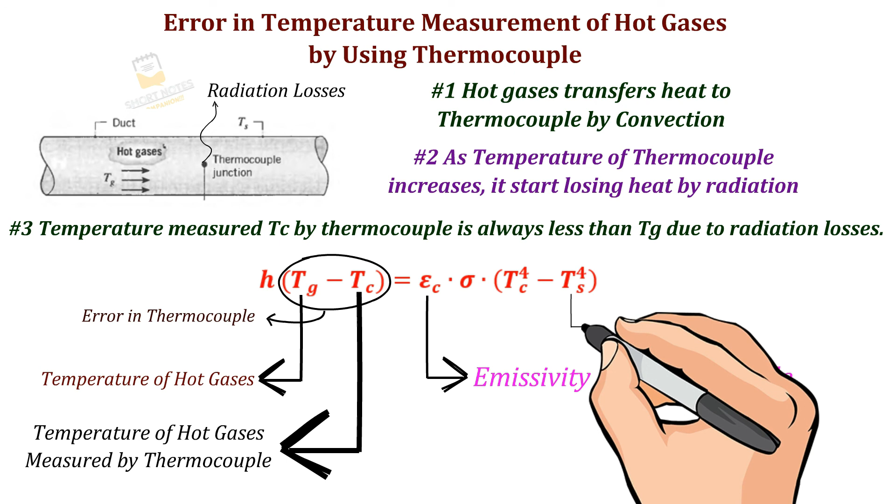So that's it for today. Here we have completed our heat transfer short notes.